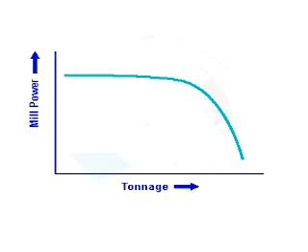In SAG mills, the proportions are about 52% steel, 20% coarse ore, 26% fine ore, and 2% water based on a ball charge of 8% and a total charge of 30% of the mill volume. Since the grate discharge holds back coarse particles, the total charge will vary depending on grinding conditions.

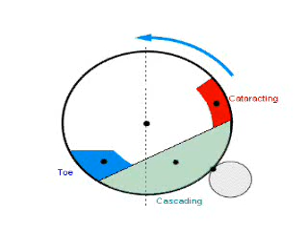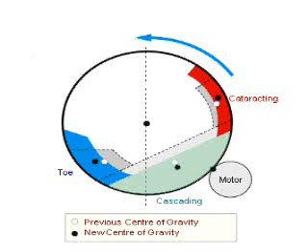The changes in mass and particle size distribution in the mill will affect the weight and the center of gravity of the load and therefore will affect power. This can be summarized in this power versus load relationship for AG and SAG mills. As the load is increased, power increases due to the increased weight until a peak is reached. After the peak, power is reduced because the center of gravity of the charge moves towards the center line at a rate faster than the increase in weight.

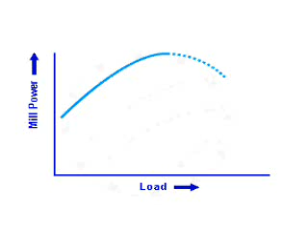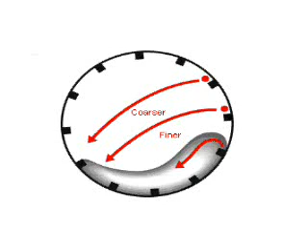Coarse particles are rigid bodies that can be keyed by the lifters and therefore lifted high. Fine particles, on the other hand, behave as part of the slurry and flow off the lifter, resulting in a lower lift. For a fine mill load, the contribution of cataracting is reduced. Since for a given mass, cataracting contributes more to power consumption than cascading due to its center of gravity being further away from the center line, the net effect is a reduced power consumption.

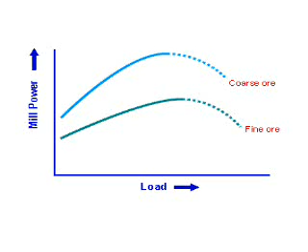If the mill power is controlled, then the set point for a finer mill load should be reduced. As the figure shows, the power set point for the coarser mill load cannot be reached when a fine mill load is present. Attempting to do so would only lead to an overload, as tonnage would keep increasing in an attempt to reach the power set point.

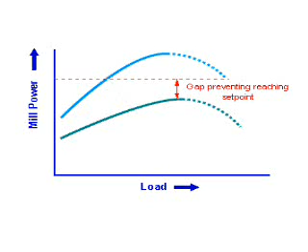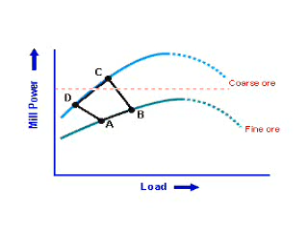When the ball charge is increased, the power is increased, since they have the same effect as more coarse particles, more cataracting. Also, since steel balls have a higher density than ore, for the same volume in the mill the load will be heavier. The peak shifts to the left as ball load increases because the effect of increasing mill load on the toe of the load, supplying power, is enhanced at higher ball loads.